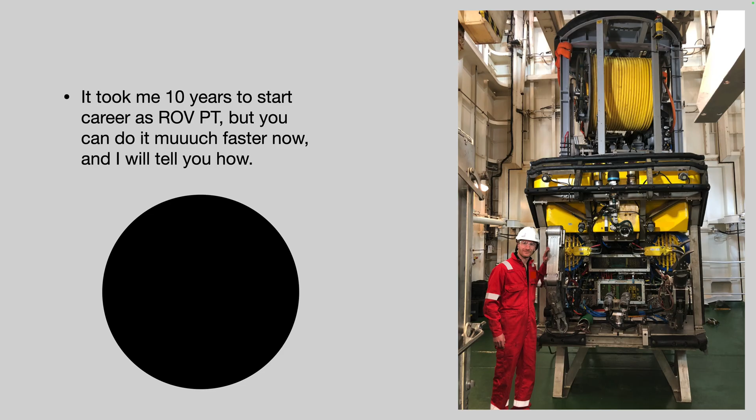Hello everyone, I'm an ROV pilot and I'm going to answer one of the most common questions: how I started my ROV career. I'll try to describe my way, and most probably it can be useful for many people, just because I've got multiple requests on LinkedIn.

Have a look at the image here. This is me, this is an ROV nearby, a subsea robot. For those who don't know what's ROV, this is one of the first trips offshore. You can see I'm in a nice and clean coverall. This is my path's beginning.

ROV, what's that? This is the remotely operated vehicle, so the good news is you don't need to operate it being inside the ROV as many people think. There is a special room called the ROV control room, and this is the point where you control the ROV from. What does it do?

ROV works underwater at sea. It takes part in many projects for the oil and gas industry. You've probably seen or know that there is a lot of infrastructure subsea - a lot of modules, a lot of pipes, a lot of cables interconnected with each other, and everything has to be installed, maintained, surveyed, cleaned, etc. There are so many tasks that have to be done underwater, and this is where ROV comes and helps to perform all these tasks.

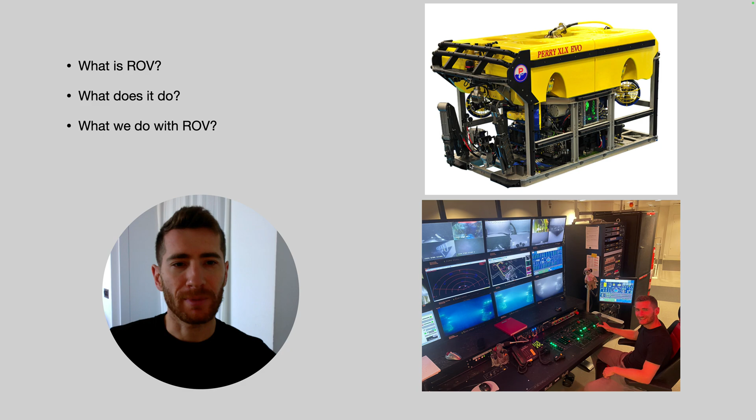Here I'd like to show just a few daily activities for those who are new to this topic, just to provide a brief idea. I'll start with this one. So this is how the ROV is being deployed underwater.

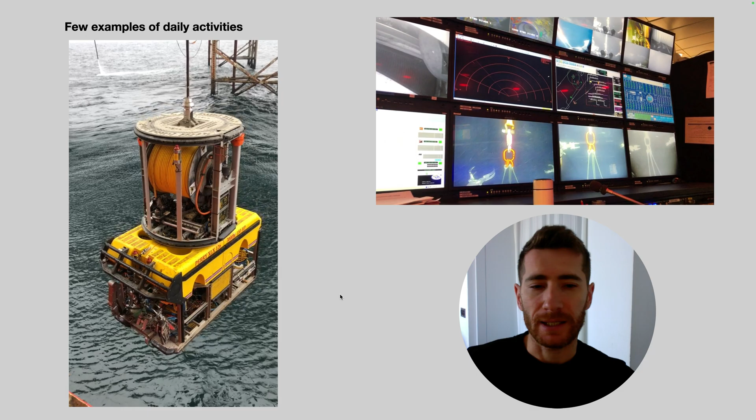Again, for those who don't know, the ROV usually is located on board the vessel or a platform, and from there it's being deployed underwater, and then the ROV goes to the work site. The system which is deploying and recovering the ROV is called LARS, or Launch and Recovery System.

This is another video from an actual project, just to give you an example of what ROV does. Have a look, you've got 3 images from the ROV - one is black and white and two are color ones. One is from the upper camera, one is from the lower camera, just to have pictures from different angles. It helps the pilot understand where it's located in relation to the object.

Once I started to explain, I'll give a bit more idea about what you see here. This is the interface from the ROV itself. There is a lot of different feedback from the sensors. Here you can switch on and off different functions like the lights or the cameras, increase or decrease the working pressure, etc. This is a nav screen, which is like Google Maps but only for the sea bottom, just to know where everything is located, and this is very useful when you need to orientate where you are now in relation to this or that object.

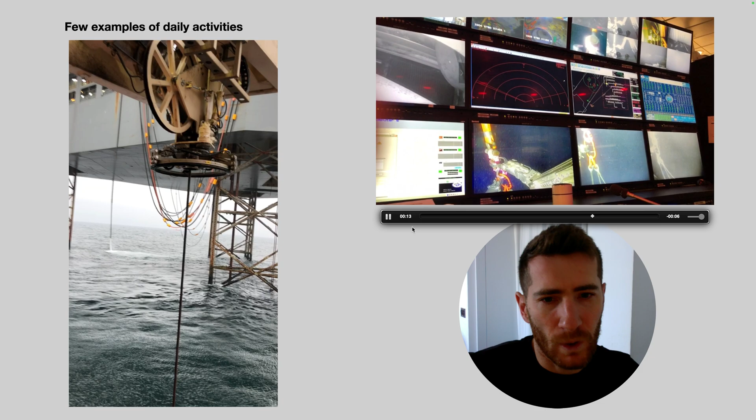The ROV is approaching at the moment, and with one arm it takes the master link. The second arm is going to release the hook. Once it's released, the ROV will go down and lower the ropes, the wires.

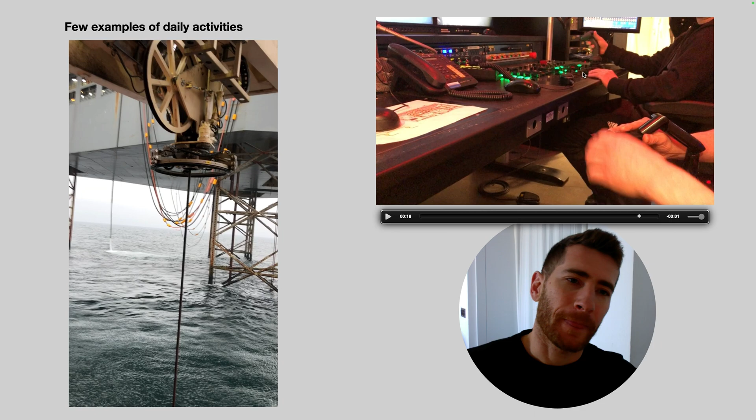Pay attention here, have a look - this is the master arm. Basically, one of the pilots is controlling the 7-function manipulator with this small arm. Whatever he does with this unit, the same motions will be transferred to the real manipulator, or slave arm. The second pilot is sitting in the pilot chair and controlling the ROV itself. It has a joystick, multiple switches and buttons to be able to fly smoothly and control the ROV. So yeah, let's move on.

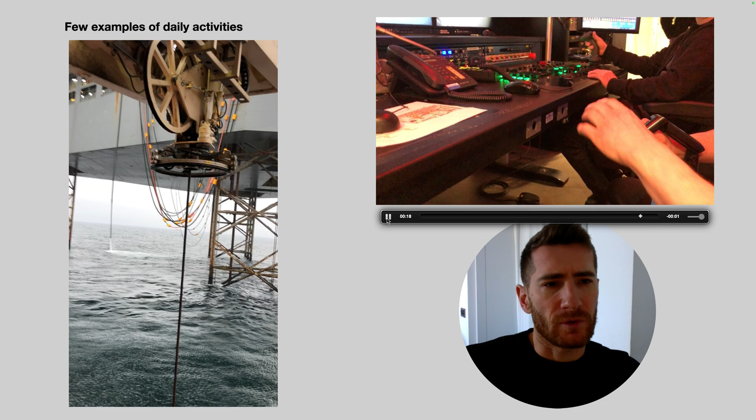Let me share my experience, basically how I started, what did I do. After I graduated the Maritime Academy as a marine electrical engineer, I've been working in a merchant fleet for a while. I was working on tankers as electrical engineer, or now it's called Electro-Technical Officer.

Then I moved to offshore. I've been working on multiple types of vessels, including platform supply vessels, construction vessels, dive support vessels, pipeline vessels, and others. It's a nice position to work for.

However, it has its own limit. Once you've started the Electro-Technical Officer job, you'll probably do it forever if you change nothing, if you won't progress, because there is no career as such. On some vessels there is like chief electrician or senior ETO, but there aren't many options. So at this stage I thought I need something else. I want to progress further.

The good point was that I found on one of the vessels there was an ROV, and I was really impressed with that. I thought, oh, this is some kind of future, so this is what I want to do. I came to the ROV team and asked, guys, advise me please, what can I do? How can I join your team? I want to do what you are doing now.

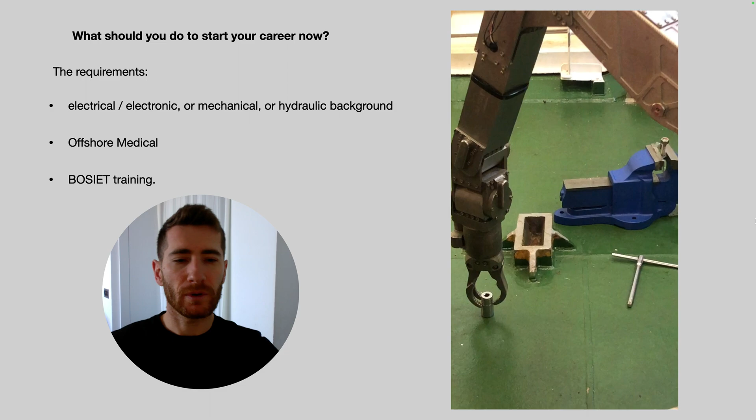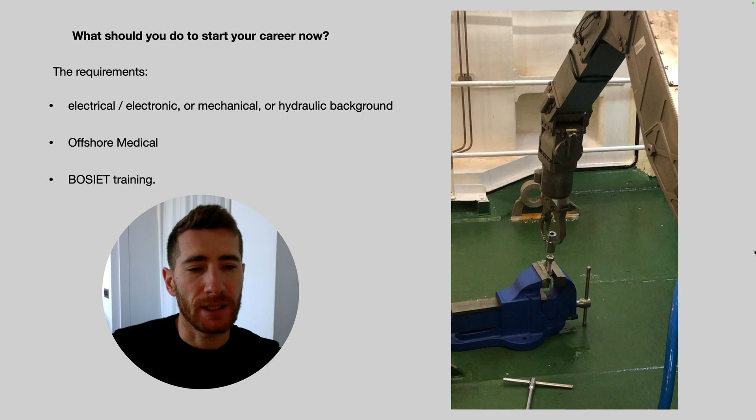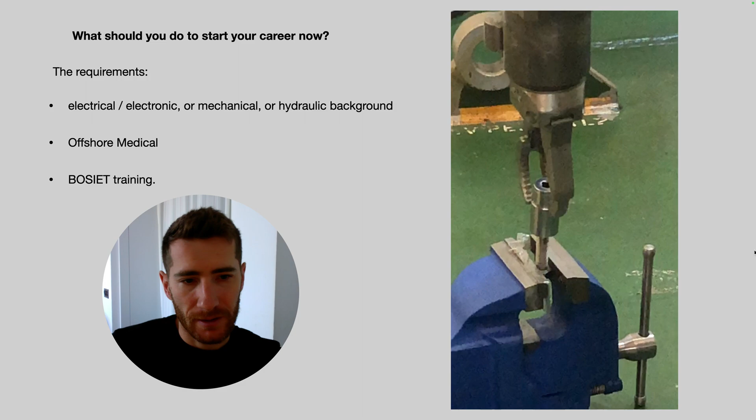Let's move on. I attached this video just to show another example. This is the test of the spare 7-function manipulator. It's in the hangar, so it's not subsea, just testing the functions. You can see it can screw the nut into the bolt, and this is what it can do also underwater. Just giving you an example of the functions.

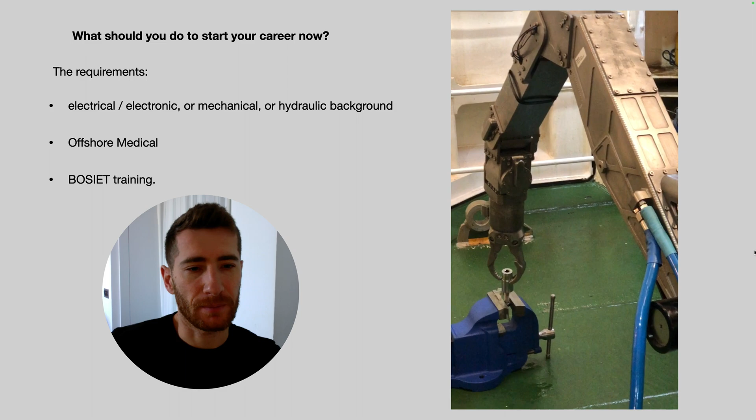Okay, let's move on. I want to describe a little bit more about the career options. As you probably remember, I started from the point that I wanted to change my career from ETO to ROV. It's because of the career opportunities. So there are progression steps.

You would probably start as trainee ROV pilot. This is what I do now. And again, the most common question would be, how much time does it take to be a trainee? That's a good question, because there is no definite answer. I would say on average it takes about 1 year, plus or minus.

I've seen people who've been working as a trainee just a few months, and then they were lucky to be in the right time, the right place, when there were no people available, and the company decided to promote the trainee as a pilot, and the guys showed themselves capable of performing the tasks. And I know a few guys who had years of traineeships. Again, it depends, but in general it takes about 1 year.

Then you're going to be promoted as ROV Pilot Technician. Then there is a senior ROV pilot position. Then there is ROV Supervisor and ROV Superintendent. Obviously, each step adds some value to your salary.